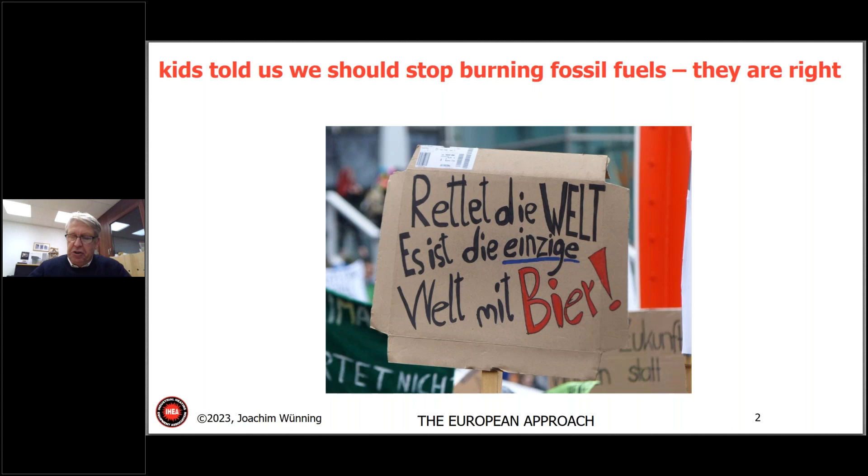However, the energy transition, as also seen in the demonstrations by the kids, at first mainly targeted getting out of coal, and we thought natural gas, because it has much less carbon content than coal, was a bridge technology we could use quite a bit longer than coal, because natural gas is not so bad at all. We thought, okay, at least for the next couple decades, we could use natural gas and be fine with it. However, all of you are aware that something happened.

It's probably now just over a year, September last year. Our big supply for Germany, Nord Stream 2, a natural gas pipeline bringing in natural gas from Russia, exploded. Before, it was shut down anyway, but we thought temporarily. Now it's pretty much destroyed, and it was an additional wake-up call for us that we have to put more effort into getting out of fossil fuels, because it's not only climate change, at least in Europe, it's also the dependency on imports from not so good sources like Russia.

I think in the United States, many people warned Europe, and especially Germany, not to build these pipelines because of our dependency. Now, of course, it's solved. A solution was found on its own because it's exploded. Now we don't have it anyway, and we have to see how to get natural gas from other sources like LNG. Some of the natural gas is coming out of the United States, but of course, importing it with ships is much more expensive rather than getting it through a big pipeline.

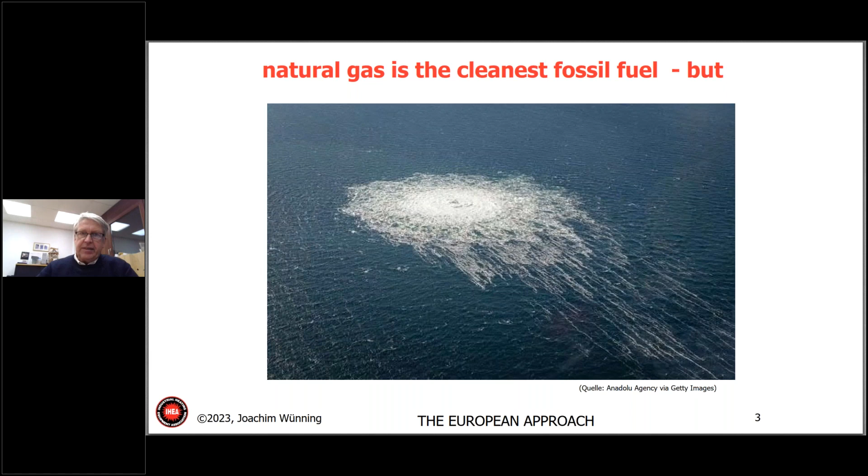We have some people here, I think it's the same as the United States, they just think, let's put up enough photovoltaic, solar power, solar modules and wind turbines in all areas. In some areas, maybe water power also, but not everybody lives in Iceland where you have enough water power or thermal power. In most countries, and especially in Germany, pretty much the only option for regenerative energy we have is solar and wind. And like I said, many people think, okay, let's build enough of them and we'll just have everything electrified, and that's very efficient and very clean, and then that's done. However, of course, it's not that easy.

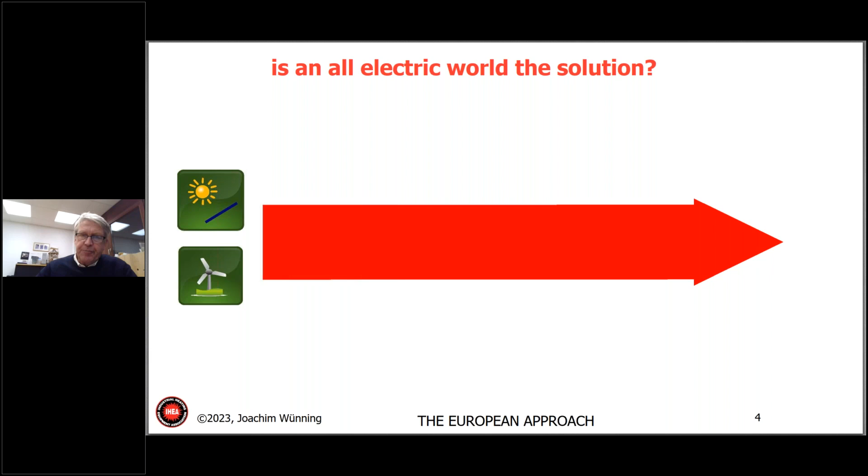There's one problem with the regenerative solar and wind is that they are fluctuating. A power plant we can turn up and down depending on demand. We can get more or less power out of it. With solar and wind, we just have to take what we get. So at night, obviously, there's no solar power, and if there is no wind, we have no wind power either. So certainly, if we build up capacity with wind and solar, we will have times where we have excess power, but we will also have extended times where we have not enough power solely from wind and solar.

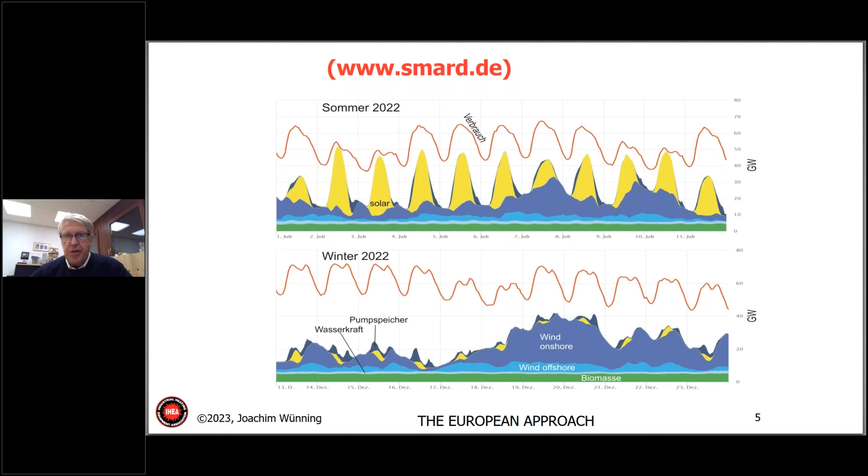We have a little biomass we can control up and down to a certain degree, but the biomass power generation is very limited. And as you can see here on these graphs showing the yellow solar in summer, the blues are wind power, and the green is biomass. There is still a wide gap in production and consumption. The consumption is a red line up there, which goes up and down by day and night, but there's still a pretty big gap. Not so much in summer if the sun is shining, but in winter when there's no wind, there's a huge gap we would have to fill.

Now people think, okay, we have batteries, but these gaps are gigawatts, so these are enormous amounts, and you cannot have so many batteries storing so much power that you could have your furnaces heated by electricity at night. It's a big amount of energy. I calculated it for an average annealing line, for example. A couple days of low wind in winter would mean you need the batteries of a couple 100,000 Tesla cars to have enough energy for one single furnace. And you can imagine these couple 100,000 Tesla batteries would be quite expensive. So storing with batteries only might not be such a good idea.

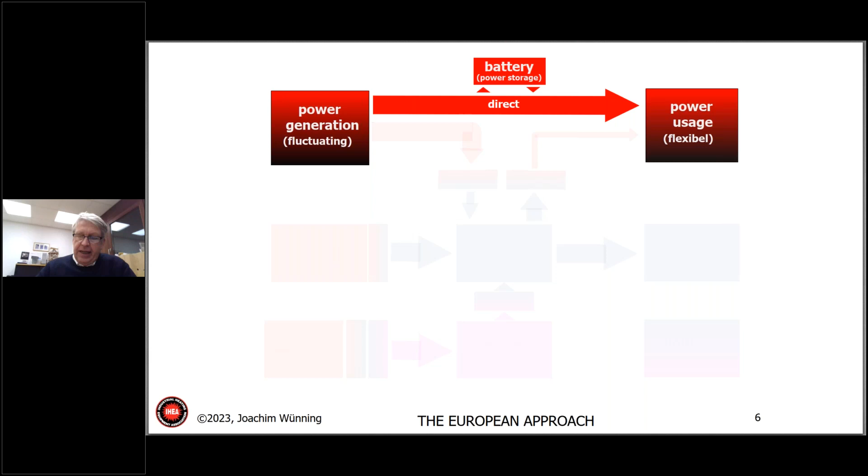That is why another thing comes into play, and I'm sure you have heard about it, and that is hydrogen. Hydrogen you can use to store electric power. Of course, you would make the hydrogen from electricity, not from natural gas. So you can pick up excess power in your grid, use the electrolyzer, make hydrogen, and store it. Your pipeline system alone would be a big storage area because you can pressurize it a little bit more or less, or you can have underground storage. There are many tests running now checking whether storage areas used for natural gas at the moment are applicable also for hydrogen storage, and that looks pretty promising.

Now, if you have low solar and low wind power, you could electrify that hydrogen again. But there's one thing you can see by the size of these arrows here. A lot of power goes into the electrolyzer, and only a very small portion comes out of the gas turbine, right?

Because you have a lot of losses in the electrolyzer, and as well as in the gas turbines or fuel cells on that way. So it will be quite hard to make so much hydrogen, at least in Europe or in Germany, that we can only make it from excess power.

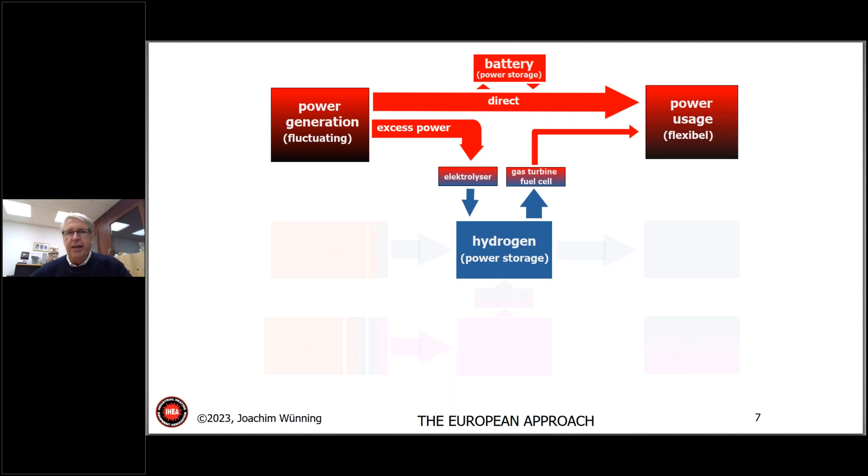We will pretty much have to depend on imported hydrogen also, because as you know, in Germany, we have sometimes nice summers, but we have long winters and not so much wind and sunshine reliably. There are areas in the world which are much better suited for that. For example, in North Africa, we could have power generation there with also cheap land, reliable solar power or reliable wind power, and bring the hydrogen over to here.

If we want to transport hydrogen, that is pretty much limited to pipeline transport, because there are also people who think about transporting hydrogen in ships. Therefore, it has to be liquefied, but that requires also a lot of power, and also the technology is not yet fully developed. So in my opinion, and in the opinion of many people, hydrogen transport is pretty much limited mainly to pipeline transport.

But now, if we have the hydrogen imported, the question is, what should we do with it? Should we all use it for making electricity with large losses? The same reason why we're not using all natural gas to make electricity. We use the natural gas directly for heating our furnaces. It is the same thought. If we have hydrogen available anyway, then why not use it directly with a much better efficiency than convert it to electricity and then heat our furnaces?

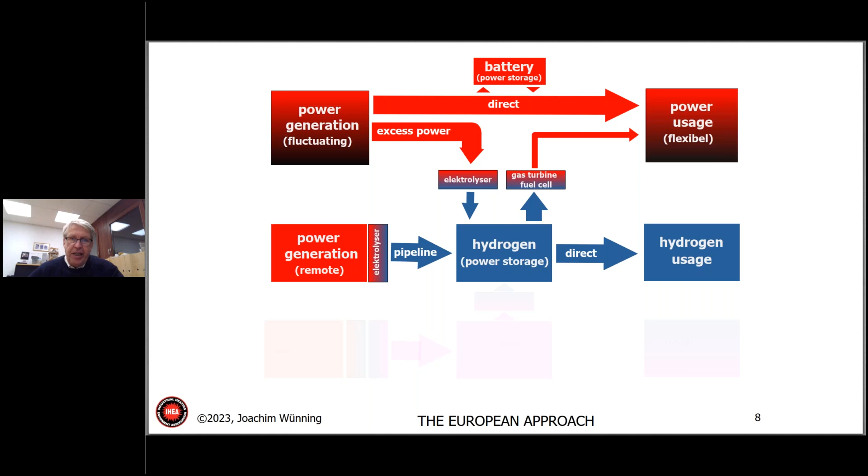Then we might also have to rely on other sources where the power generation can take place. For example, in areas with a lot of wind, like Chile. At Cape Horn it's stormy all the time, and there we could have round the clock wind turbines running, making pretty cheap hydrogen, but there will probably be no pipeline running from South America to Europe. But there is another option which is discussed widely now, to transfer hydrogen into ammonia.

And ammonia has a property comparable to LPG. Under slight pressure, it can be liquefied, with a density comparable to propane butane, so LPG, and can be transported in ships around the world in big tankers. That is done already today, because ammonia is a chemical used for fertilizer production, and it's commonly shipped.

Why ammonia and not methanol or something else? The reason is that ammonia is pretty much the only carbon-free fuel with these specifications. Carbon-free means if you're sitting in Chile, you can use nitrogen, so basically air, water from the sea or the mountains, and electricity, and make ammonia. While if you would make methanol or methane, you would need a carbon source and either ship the carbon as carbon dioxide, which would be costly, or capture it from the air, which is also quite expensive. Therefore at the moment ammonia is seen as a major carrier for energy in large quantities over large distances.

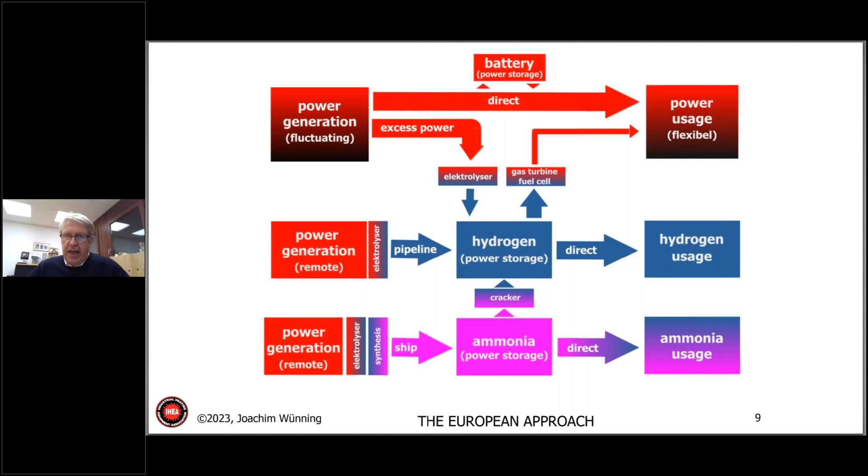But that's basically the three options you will have in the future. After natural gas, you can most likely switch to hydrogen, but of course in some cases it might also make sense to heat electrically, or in some cases, especially if you are not linked to a hydrogen pipeline, ammonia might also be an option.

So our job at the moment is either electric, or we want to have fuel flexible burners which can use the fuel gas which is today in the grid. That's natural gas. Of course, at the moment there is no hydrogen, at the moment there is no green ammonia available, so it makes no sense to burn anything else than natural gas in these burners and furnaces.

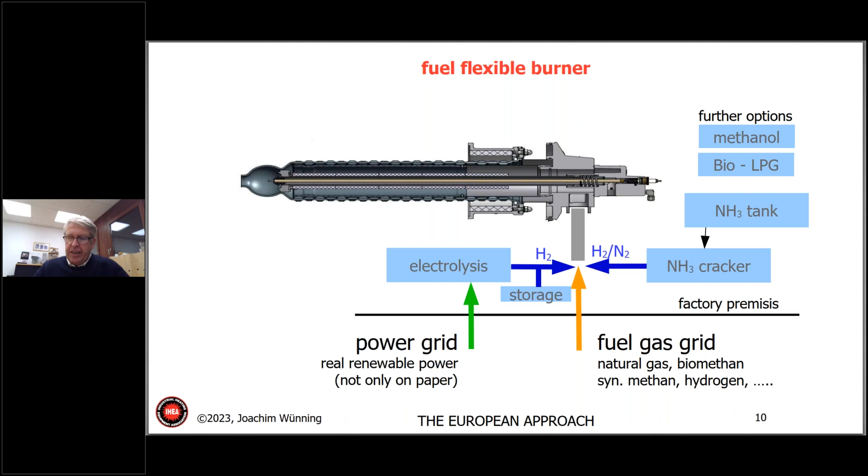But to prepare for the future, we have to think about burners which are able to burn hydrogen, either natural gas or hydrogen, or mixtures between it. And we are also thinking about burners which are able to burn ammonia. Of course, you could think of also bio-LPG or biomethane, methanol, and something else. But the main things I think will be at the moment natural gas, fossil, or hydrogen, and in some cases ammonia. So is that possible? Can we use existing equipment and technology and further use it, or what is it?

You take a first look at the fuel gas data from natural gas and hydrogen, you think, oh God, never possible. The calorific value 3 or 4 times higher for natural gas, the density 8 times higher, air requirement totally different. So at first glimpse, it looks like if you go from one fuel to another, you have to tear down everything and rebuild it. But you take a second look, it looks a little different.

And I don't know whether everybody's familiar with the Wobbe index. The Wobbe index is a gas exchange factor used also by the gas supply industry to determine in meters and pipelines what is the difference between 2 fuel gases. And it's a formula made out of a combination of the calorific value and the density to see, through a given pipeline with given pressures, how much energy is flowing through these pipelines or orifices or openings.

And here you see natural gas and hydrogen are not so much apart from each other. That means if you send natural gas through a pipeline and with the same pressure you exchange the natural gas with hydrogen, you almost get the same, 15% less, but almost the same amount of energy through the pipelines. It means if you increase your pressure a little bit, you get the same through.

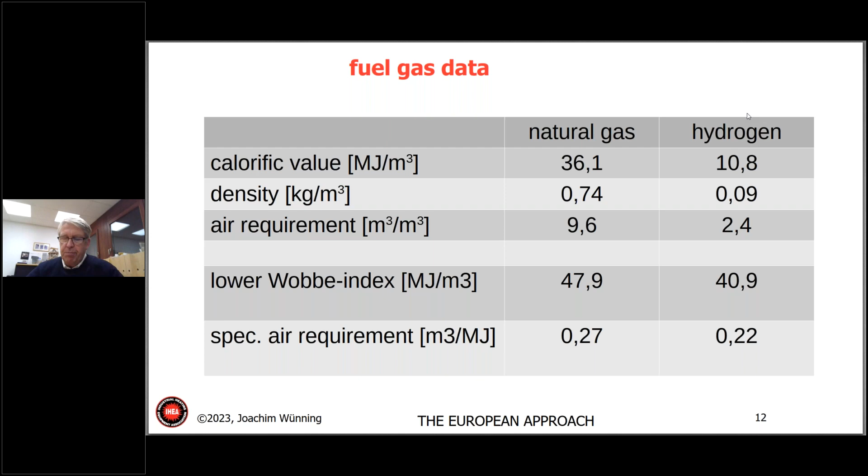Now, of course, besides the Wobbe index and air requirements, there are some other characteristics, and that is the burning temperature, which is a little higher with hydrogen, but only slightly higher. But a major difference between the 2 gases is the flame velocity. If you have a mixture of air and gas and you ignite it, the flame will have a certain speed as it moves through that mixture. And that speed is quite a bit higher with hydrogen.

So it might not last so long if you just take a burner, switch from natural gas to hydrogen and do nothing else. You might have damage on your burner if you are not looking into things a little more closely. But other than that, it will probably work.

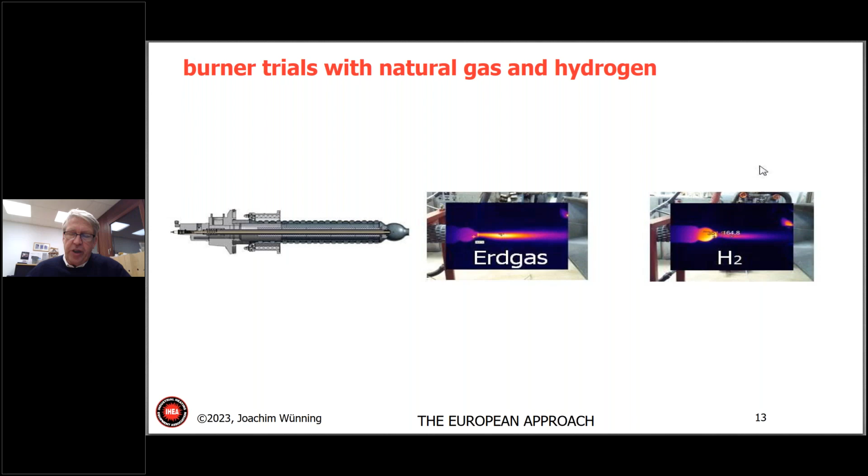And of course we and other European burner manufacturers, I'm sure also in the United States, started, I think the main work started about 4 or 5 years ago, to look into what we need to change on the burners. And pretty much everybody now has solutions. You can exchange your old burner for a new burner, or you can use your old burner and change some parts to make it work, or some burners might work without major changes, where you can switch from natural gas to hydrogen and be ready.

So in 2021 we did a first burner trial. This is a horizontal annealing line for silicon steel with radiant tubes. With radiant tubes, the nice thing is you don't have to convert the whole furnace. In that furnace you have a couple hundred radiant tubes installed, but you can test it on single burners, because it's a closed system, to see how things work. We converted 2 burners from natural gas to hydrogen, let them run for a year, then took them out again and looked at them.

And really, there was not too much to tell about. The burners just performed. They survived. They didn't look any different than the other natural gas burners after 12 months of hydrogen. Of course, we picked them because we thought that is a good demonstration area. But now our customer is pretty much convinced that if hydrogen is available, he can use the hydrogen with this existing equipment.

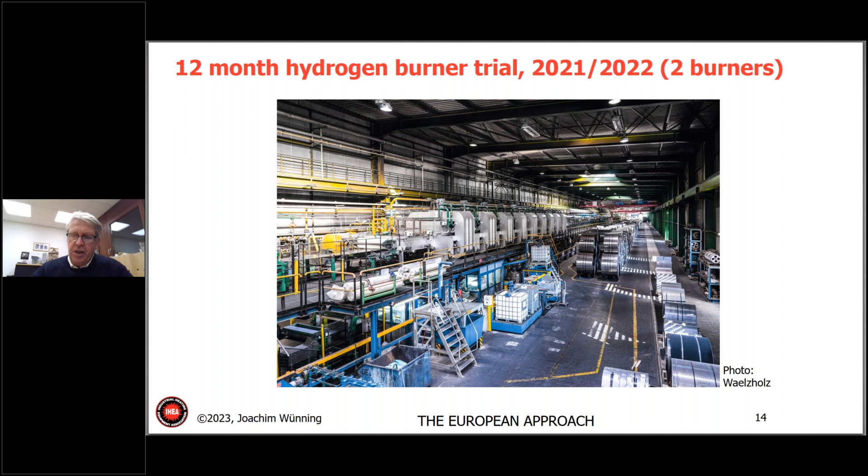Of course, before you switch, you would have to check for tightness and everything else, and make a big maintenance checkup on all the burners. But if you have done that, he can be sure that he can run his furnace with hydrogen. That could be the case if hydrogen is available and, of course, if there is a market for green steel. There might be customers who say, we don't want to buy steel which was heat treated by fossil fuels. So the first test was quite promising for us.

We have a second project together with ThyssenKrupp, the German steelmaker, Aachen University, and our company, funded by the German Ministry for Economy and Climate Preservation, where we also use a radiant tube system, but here it's a vertical annealing line with double P radiant tubes. Here the task was not only to switch from natural gas to hydrogen, but to switch back and forth in running production.

That would be the case, for example, if they decide to have a local electrolyzer on their premises next to the furnace. If there's excess electricity, they could make hydrogen and use it instead of natural gas. If there's no sunshine or no wind, they would go back to natural gas. If there's enough sunshine or wind, they could go to hydrogen or a mixture of hydrogen and natural gas. And of course, we want to check if that can be done automatically, without anybody having to go to every burner and readjust something.

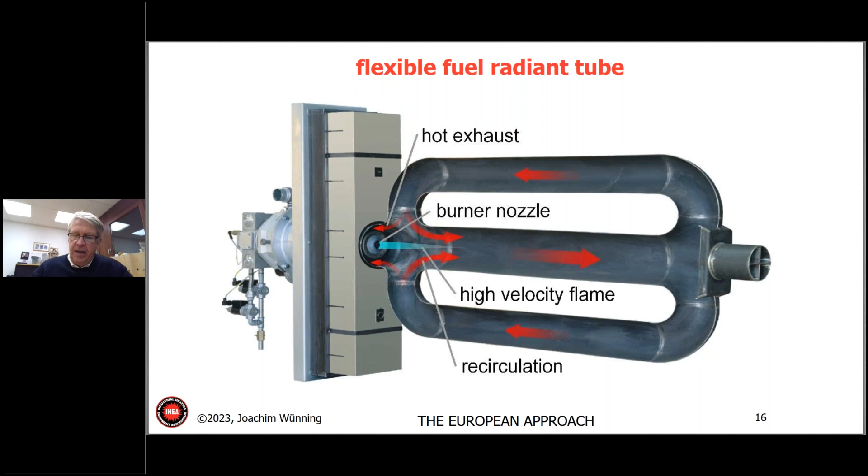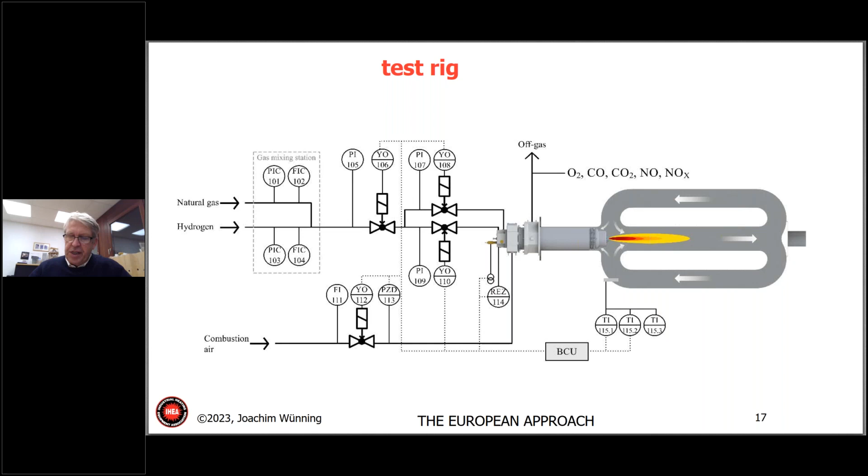The University of Aachen set up a test rig with all kinds of measurement devices so they can monitor everything, especially the NOx emissions, because we don't want to switch to hydrogen and then have high NOx emissions. We want to be as low as we are today or even lower. Of course, we used the FLOX technology, a specific technology developed by WS, our company.

Since FLOX, or flameless oxidation, runs without flames, that gives us the opportunity to get rid of the problem with flame stability and the high flame velocity of hydrogen. Because if there is no flame, there is no flame velocity. And we can have a burner with very much the same characteristics running with hydrogen and natural gas, with the same temperature distribution, because we avoid the flame anyway, also with natural gas.

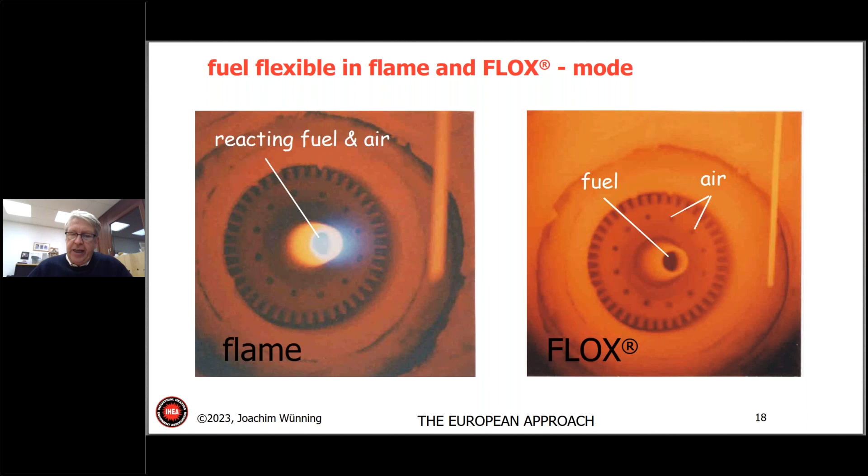We tested that. We tested also then the NOx emissions. And here we had 3 different configurations. We started with the existing configuration. That was a first setup, you see the red curves. And here we started with pure natural gas on the left side, and then up to 100% hydrogen on the right side. And the left diagram is shown for flame mode at around 800 degrees or 840 degrees centigrade.

And here you see we started in the red case with 200 milligrams per normal cubic meter, which is still below the German limit, which is about 350 in some cases and 500 in other cases. But if we go to 100% hydrogen, we are pretty much hitting that limit. So we are not really exceeding it, but we are hitting the limit with 100% hydrogen.

Then we changed the configuration to the blue line with a different setup in the burner, and we could lower the emissions also with 100% hydrogen, but still more than natural gas. And then we had a third configuration where we still get it lower, still rising the NOx emissions when we go to 100% hydrogen, but then we switched the burner at 850 degrees centigrade to flox, and then you can see here a different characteristic.

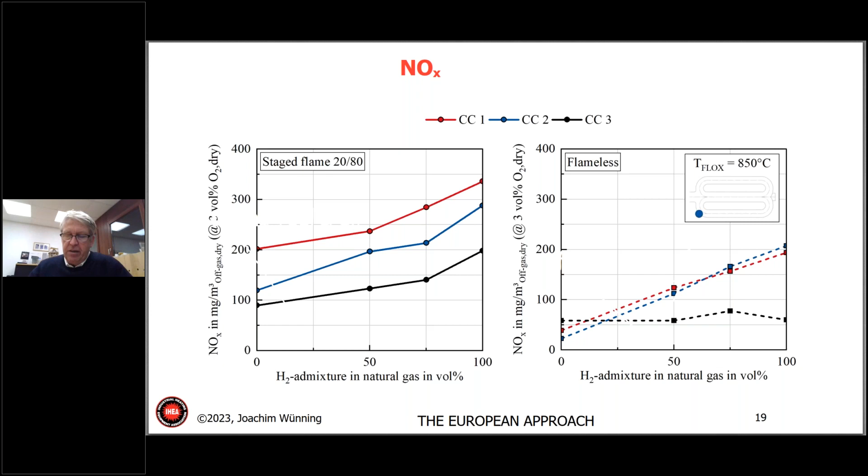With hydrogen, actually, you can have a correction factor because it relates to dry gas, and since with hydrogen you get more gas out, you can even have in reality a lower number. If you would relate it, for example, to pounds per million BTU, you would even see a decreasing number if you go to hydrogen. So that was very promising, but so far that happens in the lab.

But in the next weeks, we will install it in the real line. So these are people from Thyssen and Elsa, our French engineer from the University of Aachen, and they will convert it, and then we will run it here for a year and see that the results also hold true, not only in a lab furnace but also in a real furnace, and we'll switch back and forth from natural gas to hydrogen and see what the burner is doing. The radiant tube is fully equipped with thermocouples so that we can also see if there is an influence on the temperature uniformity of the tube and anything else.

Besides that recuperative burner, we will also test regenerative burners. Regenerative burners have an even higher efficiency, and lately that's what we sold most of the time. In the United States, for example, some of you will know there is a former Thyssen plant down in Mobile, Alabama. There are more than 700 of these regenerative burners installed in 4 galvanizing lines, and we tested these burners pretty much unchanged. Just a general maintenance checkup on the burners, but then we could use them with 100% hydrogen without further modification. And here we have efficiencies of more than 80%, and the NOx numbers are all the time below 100 milligrams. So very promising results here also for these burners.

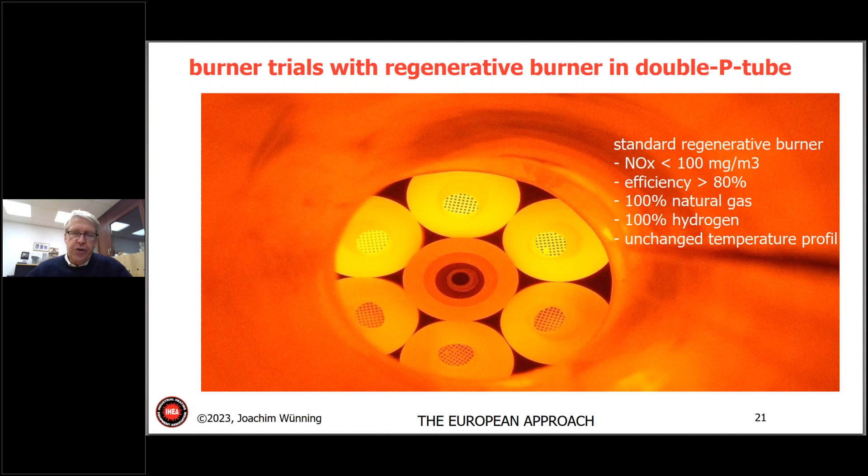I think it's too early to say it should run also ammonia, because there are no burners available yet on the market which are flexible to use natural gas, hydrogen, and ammonia. We are working on it. And we are not the only ones working on it. Last spring, I attended a combustion meeting.

It was more scientific, not so much practical, but here there were 100+ papers with the word hydrogen in their title. So a large amount of papers which dealt with hydrogen. Many institutes all over Europe are working on that problem, and more than 50 papers had the word ammonia in their title. So it's also a topic where many universities, very many research institutes are working at.

And I'm very positive and hopeful that we will see results in the near future, that we are also able to burn ammonia with low NOx combustion, and I'm sure we will have it before the ammonia will be available on the market, because burning green ammonia, that will be another 10 years, I would think, at least, before that hits the market, and these 10 years should be plenty enough to develop the systems which are also able to burn ammonia clean.

So that we will have all the options, still using natural gas to a certain degree, but being able to switch to the other energy carriers like hydrogen, ammonia, if they're available. And if we know it works, we can lean back relaxed for the future, because we know we have done our homework before things approach.

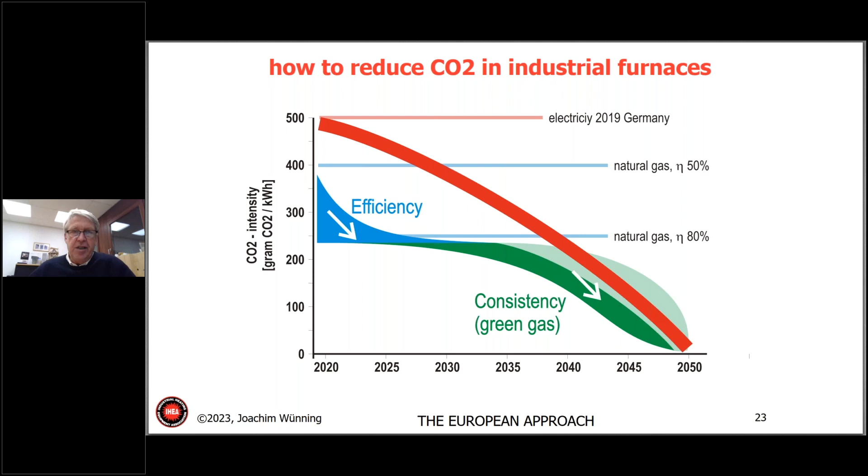You will also see, if you switch to electricity today, you pay a high price regarding CO2, but also you pay a higher price because electricity is about 3 to 4 times more expensive than natural gas. So over 10, 15 years, that would add up quite a bit. So I think the most economical, but also ecological solution would be efficiency first and then flexibility second. Yeah, that will bring me to an end.

For local traffic, an electric car is fine. For long-range traffic, hydrogen cars are perfect. I think for the truck industry also. So hydrogen is a very nice fuel. It's clean burning, it's reliably starting, and it can be handled safely. I think not more dangerous than natural gas, and certainly safer than LPG because of the low density. If you have a problem, hydrogen goes up, and it's not accumulating on the ground.

So I think with hydrogen, we have a solution available. Of course, the hydrogen must be available. It must be a competitive price compared to the other energy carriers. But if things go well, I think we have a solution here ready. The thing is now to do it. Therefore, we need politicians. We need to be prepared to pay the prices required for that, but then we can do it.